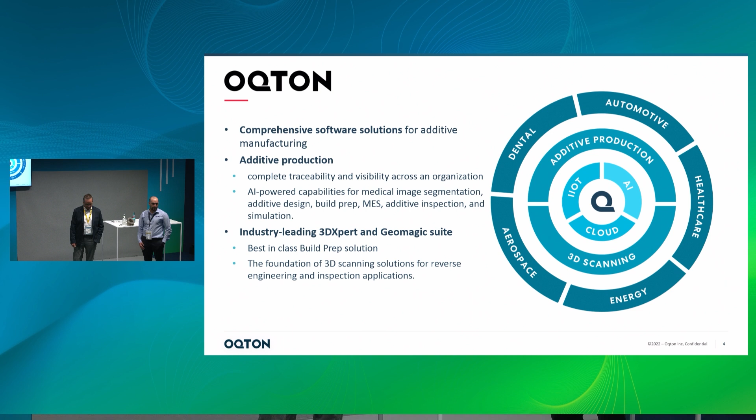Right? Oqton? Yeah, we are working with Baker Hughes, and we are a software company. We have a very comprehensive portfolio of products that ranges from reverse engineering. We have a manufacturing operating system in the cloud to streamline production, and we also have software for build preparation, simulation, and monitoring and inspection, which is 3DXpert. So we are best in class for that type of products, very solidly working together with Baker Hughes.

Perfect. So now let's go to the problem that we're trying to solve. So we want to use additive manufacturing in our industrial processes, as a disruptor of the secondary metal fabrication processes, right? So we want to replace processes that are over 100 years old, and during those 100 years, we have lessons learned, failures, catastrophic events. Then those lessons learned are put into regulations and product compliance and standards that we have to follow to not repeat those mistakes again. The liabilities in the energy sector are huge, right?

So a failure is a catastrophe. It could be environmental, or it could be a disaster on a city or on a community. So the liability for the operator or the manufacturer that puts those parts in practice has huge impact. We're not talking about simple parts. We're talking about critical components. So the question is how we can cover the liabilities, how we can assure that the process is repeatable every time. And every time that we develop a new product, the sustainability of that product goes beyond just the first sample that we print, because we have to repeat that over and over because the liabilities are there, right?

Okay, so with this in mind, we work on all the aspects of the energy. We're in the gas technology, the industrial. We're part of the industrial asset management for the industry as well. We touch the energy from oil and gas, drilling and extracting the oil, all the way up to producing electricity from the turbomachinery equipment. So we have a portfolio that is end-to-end in the energy sector.

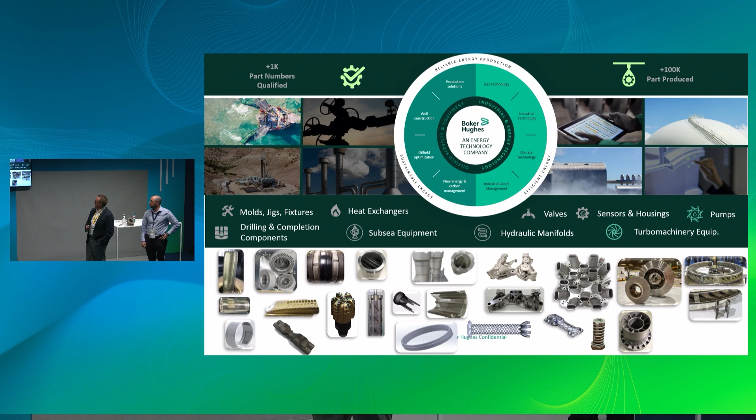Now, go to the next one. For us, the key in process control is, of course, the governance, the control, and the quality assurance. But we know for a fact that additive manufacturing has hundreds of variables throughout the process, and we have to actually monitor those hundreds of variables and identify which ones are the sensitive variables for that process control to be stable.

So we do actually have to make a profit. We don't rely on government subsidies or equity funds, right? We have to actually make money. So we have to find solutions that are practical and provide us an ROI versus the investment that we put in. One of the first things we noticed was, okay, guys, 50% of our quality notifications are coming from recoating issues and from simple parameters in the machine that we could actually monitor. The rest are quality notifications that we can go deeper on and analyze.

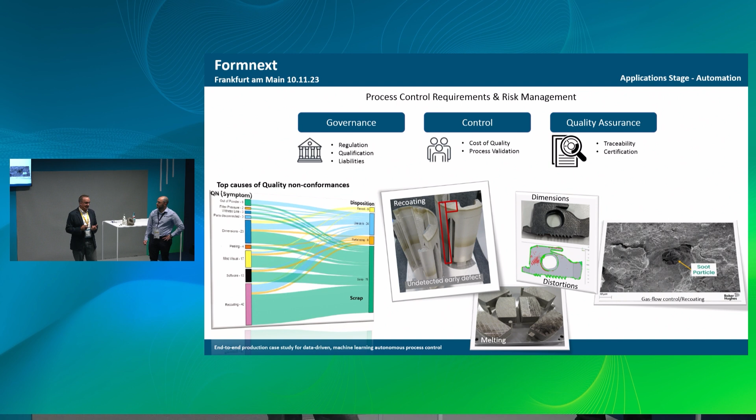So the question was, okay, how can we monitor, prepare, and really have the documentation stable enough that we can be confident we are okay with our liabilities, but at the same time produce a report quickly for our customers? And if a regulatory entity comes and asks us, can we provide enough documentation to prove the process was really sustainable? That's the question, how we do that. So some time ago, we started evaluating whether we could simplify that process monitoring so we can have a quick reaction and have that documentation streamlined.

So we partnered with Oqton, and Oqton helped us develop that really quick, practical tool that we initiated, but they took it to the next level. Yeah, thank you. So basically, we try to streamline the quality control over the whole production: before, to prevent anomalies, then during, with in situ monitoring in real time, cloud-based, in order to detect these anomalies and be able to do something about it, something real that can prevent machine time loss, and also material loss, of course.

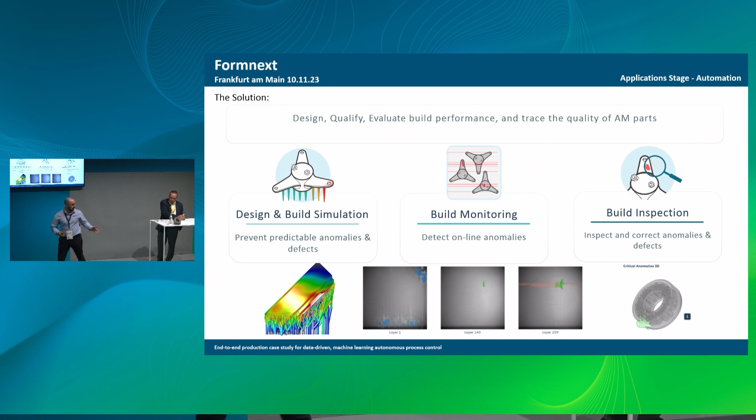And then in the end, an inspection of your parts together with simulation data and an overlay of scan paths, to create a report that allows you very compactly to show that your part is reliable, that your parts that you built maybe 20 years ago are not the problem.

And so basically here we have a build and a simulation product, which is a GPU solver that allows to prevent issues like shrink lines, deformation, cracks in support structure and so on. Of course, you cannot predict everything. A physics-based simulator only predicts things that are predictable and not micro errors in the process or things like this, quality of powder and so on, things that you cannot really prevent.

So what you can do then is you can connect with an edge device, we call it gateway, to a printer, any printer. We are printer agnostic, but in this case we work together with Baker Hughes and with SLM in order to provide this solution. And we have a best-in-class AI model that does also volumetric aggregation.

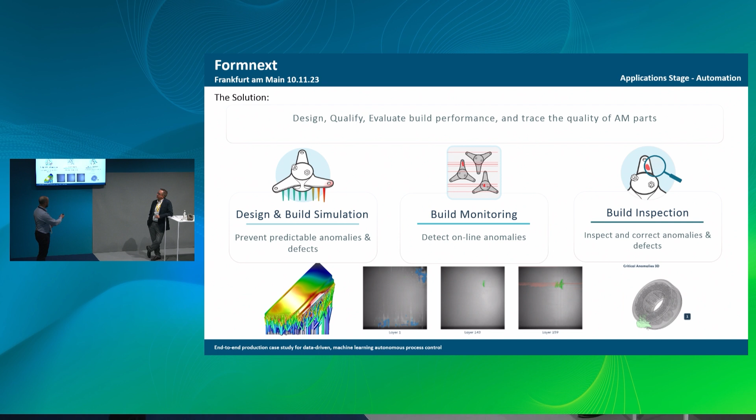You can export these results that run in real time and then bring them into 3DXpert, visualize them together with simulation, with scan paths, and start to think about root cause analysis if there was a problem. And if there was not a problem, you can go to your customers and tell them, here it is. This is the quality I provide for you. This is a little animation of actually this part that you can see there.

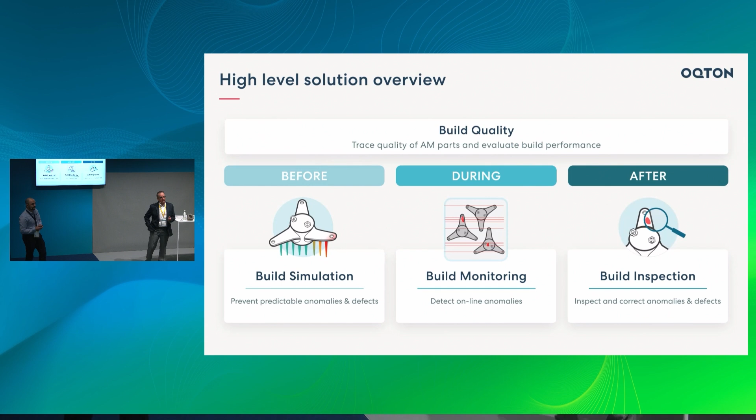I don't know, JC, if you want to mention something about this part. Yeah, so this is the valve that runs in the refineries, in the nuclear plants, and in different chemical organizations; they have to restrict flow, change the CV, noise attenuation. It's actually a production valve that we run on AM as a standard manufacturing process.

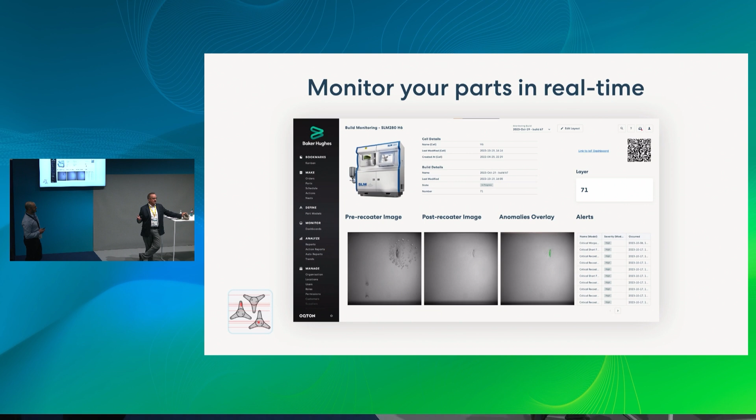So I actually took this valve, I went to the production floor and asked them last week, just cut one for me with a support structure so I can take it to Formnext. So it's exactly the production part that we're running right now.

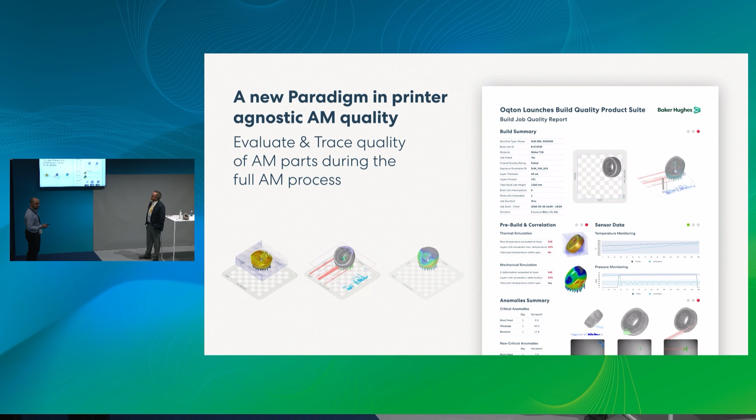Right, and indeed, so this part is what we used as an initial test case to show. You can see here that the first stage we did like mechanical simulation and deformation, thermal analysis to prevent overheat, and already you can start populating your report with this type of information if you had some pre-deformation that was above the...

Can someone replay the video, please?

So, well, anyway, the video was showing thermal analysis. And then after the thermal analysis, there is the real-time monitoring video that actually shows the online process monitoring, fully in real time, layer by layer, with 3D aggregation, and afterwards, 3DXpert again.

How do we do it? How complex is that? How much can you actually use it in production where indeed you actually have to make money? It has to be practical. So the idea here was just as simple as taking the images from the machine as they are rectified, and hundreds of thousands of images that have been labeled with the production floor, and those have been trained to identify the most common problems that we had in that table that I showed you at the beginning, right?

So the AI model is actually trained to identify quickly, okay, this is a potential issue, you have a recoater issue, this is a distortion that is coming up. So that's how the model actually works. And we actually don't ask our customers to add any hardware to the printer. We purely work on vision. If you have a camera there, that's it. It has to be quick and it has to be useful.

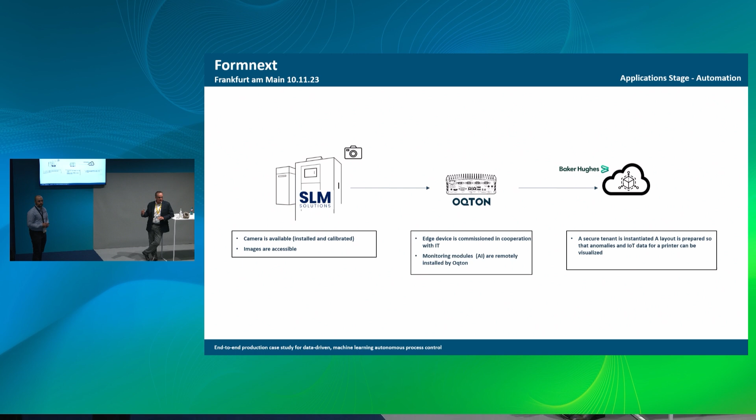So we connected an SLM printer with our Oqton gateway, and then from the Oqton gateway in the operational workshop of Baker Hughes, we stream data to a tenant of Baker Hughes on our cloud platform. And we basically show all these analyses in real time. So this is in real time. It's not after post-processing. So as the images are coming, the edge device is actually processing those in the AI model, and it's automatically generated.

Right? So indeed, it's just real-time images of an accuracy that is good enough, not too high, not too low resolution, analyzed in real time on the edge device such that we can have a very limited amount of data for speed that can go to the cloud in real time.

And in the end, you can have an analysis, scroll through your images, scroll through your volumes, and take action during the print. If you have a problem and you see that an anomaly is growing, you can stop the print before. If it is affecting other parts in a tray because you have a recoater line, you can just skip that part, and that is a lot of time and a lot of material and money that you can save.

The operator obviously has to take the decision for now because they're the expert. They have to evaluate if the anomaly is severe enough in order to take an action. And then, let's say that the build goes well, it can still be that an anomaly is not critical, the build still finishes, but it aggregates, it brings some little defects, some little anomalies, and is it good enough or not?

So we can export the data, show it in 3DXpert, and create a traceability report for our colleagues in the workshop to basically check, okay, this is good enough, this is not good enough, very quickly, and if something is not good enough, they can go deeper, see the images, go and check inside of 3DXpert what we can do with a different support structure.

So there are two values for us here. The first value is that in real time we can actually have a flag if something is going wrong. The operator will get a message, a text message, or an email: hey, look in this machine, something is going on, and he can go and check it out. That's the first thing.

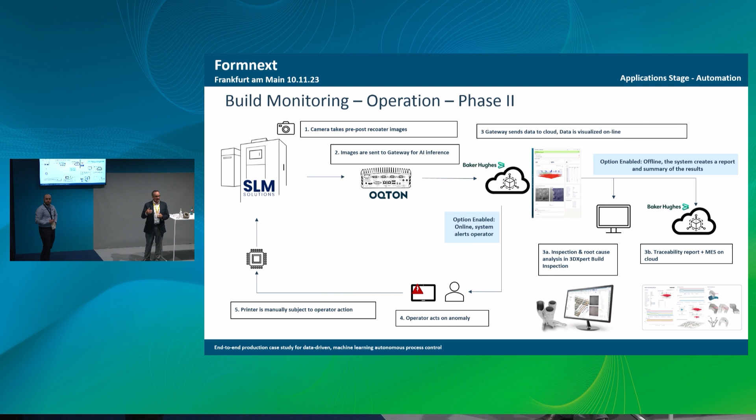The second thing is that once the part is completed, all that imaging is actually indexed in the 3D CAD to the part that we produced, and we produce a condensed report telling you how good the print was. Was it good enough to pass the qualification process, or do we have to go to an extra level of inspection, maybe a CT scan, so we can make sure that the part actually passes the screen.

But the safe part is that if it's a critical component, we don't have to CT scan every single component. If the process has no flags, you just move on. If you have some flags, then those are the ones we identify for more intense investigation, CT scan, or any other volumetric inspection that we can do.

So there will actually be an example on the screen. If you want, you can have one of these. The reason why I say that is that a lot of other processes have reports, but here we're not talking about a 200-page report. Baker told us very clearly, 3 pages max, that's your limit. 3, we get to 5. I just added 2 just to be a bit safer. But 3 pages max: look at your parts, analyze them quickly, then delve deeper if you really need.

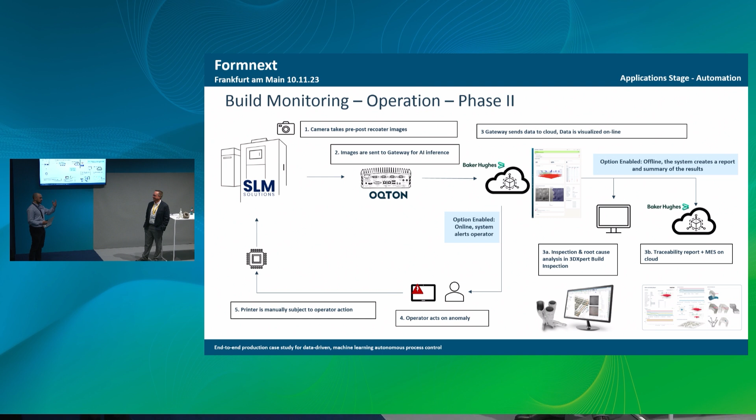Correct. So in a nutshell, we try to identify deformation, stresses, recoater interference. We try to look into the shrinklines prediction, thermal, and overheat. With those simple identifications from the image, with the AI model, we get those flags, and that helps us significantly in production.

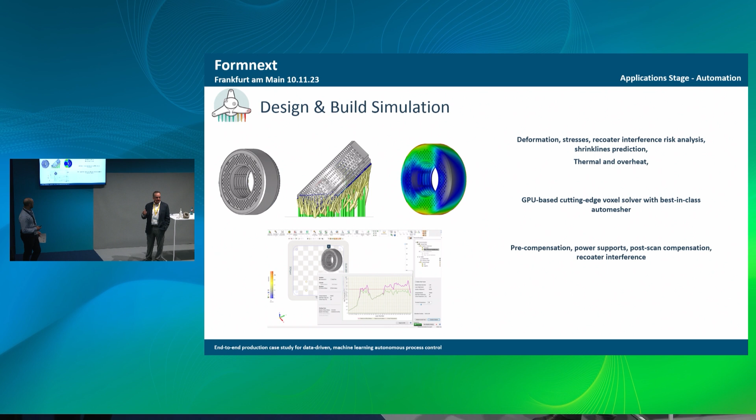Now, the next one, these are the pre-recoater images. These are the post-recoater, and this is the anomaly overlay. So we do those overlays and go into 3DXpert, and then we can get that report in real time. The good thing about this is that the operator doesn't have to be at the machine all the time looking at the part, right?

If something didn't flag as a red that had to stop, and it may be a yellow, since we put those thresholds, you can post-mortem go into the image and identify which layer it was. You have thousands of layers and thousands of images. The software will tell you, look into this one, and then you take your decision whether to pass it or not. So it's very practical.

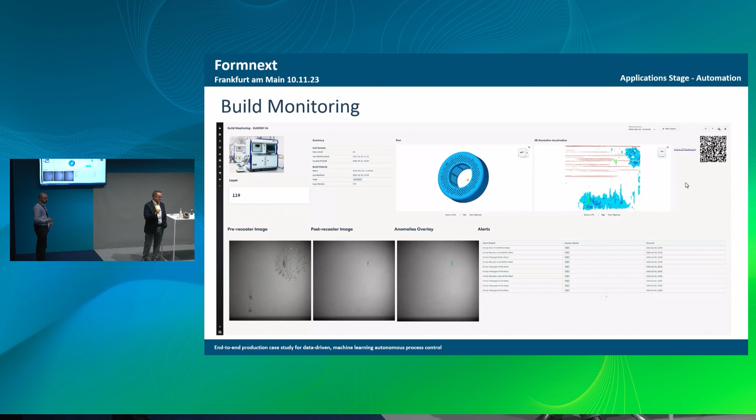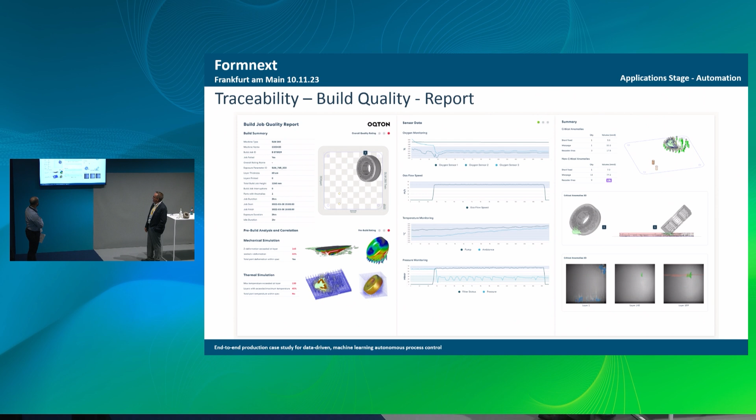Exactly. And at the end of the day, what we demonstrated, go to the last one because we're running out of time, is that we achieve a cost-efficient way to monitor a process in a way that is practical, right? It's not over the top. We have evaluated pool monitoring, sound detection, but I think we landed on something that's basic and easy to utilize. It's an open system.

The idea in our strategy is to really go into an autonomous process, and this is just one step for us to go into that autonomous process, right? And that's really the case example that we have for you today.